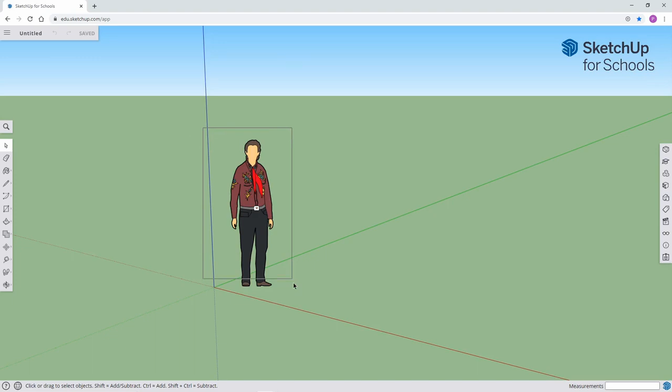The purpose of this lesson is to learn about components.

Let's insert an image. Locate the file. Open. Click the blue image button. Hover over the origin and click. Resize - the dimensions don't matter.

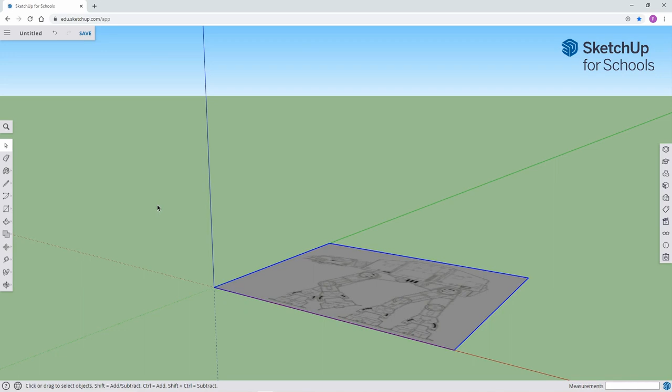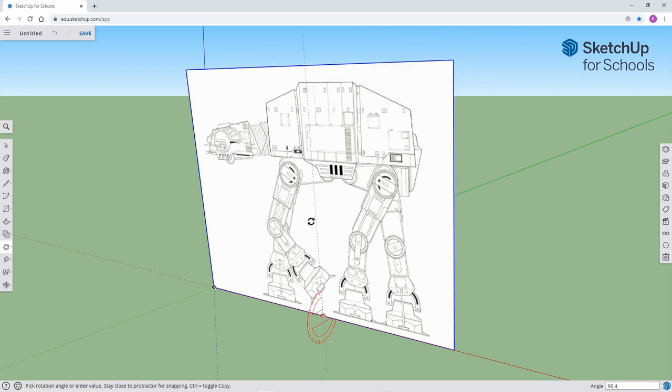Hotkey Q to pull up the rotate tool. Toggle to red. Move over the red axis. Click. Extend an arm, and pull upwards, locking on the blue axis.

Select the movie icon. Look for the house. We're going to click on the side view. There we go.

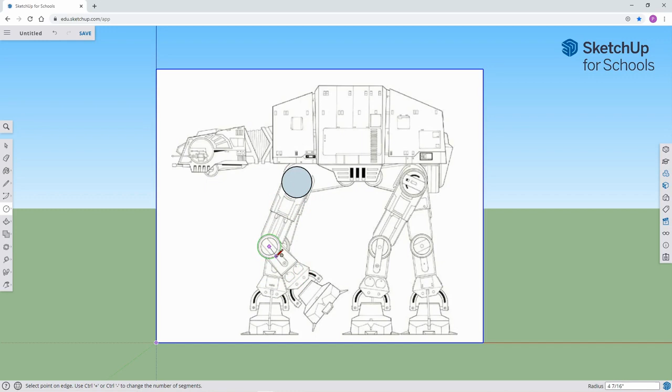Now, let's get right into making some components. Bring up the circle tool. You don't have to be perfect. This gear here looks a little smaller. And there's one back here, I notice.

Now, let's give them some color. Select. How about a blue? Oh, I think I'll paint this one red. And the small little one, how about a nice tan color? Oh, that looks good.

Okay, let's select, right-click, choose Make Component. Now let's name them. This one will be Gear Large.

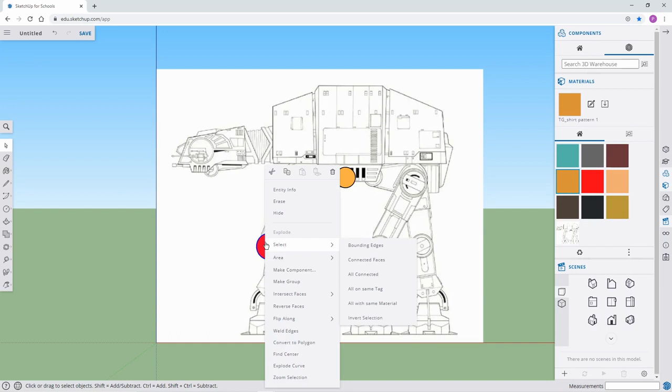Let's select the red one. Right-click, Make Component. Let's call it Gear Medium. And the small one. Right-click, Make Component. We'll call it Gear Small.

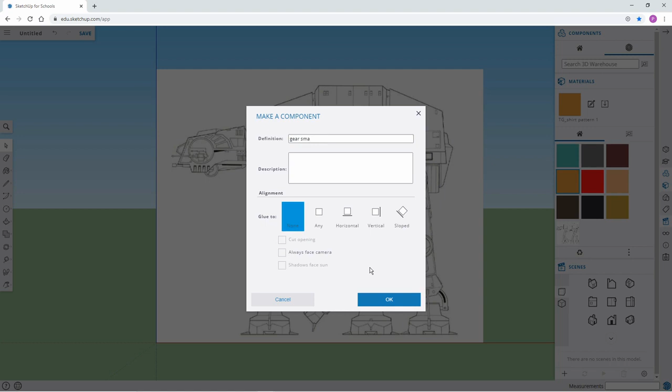The nice thing about components is that we can use these pieces whenever we want. I will demonstrate by deleting the pieces. As you can see, I have a basket of them to choose from.

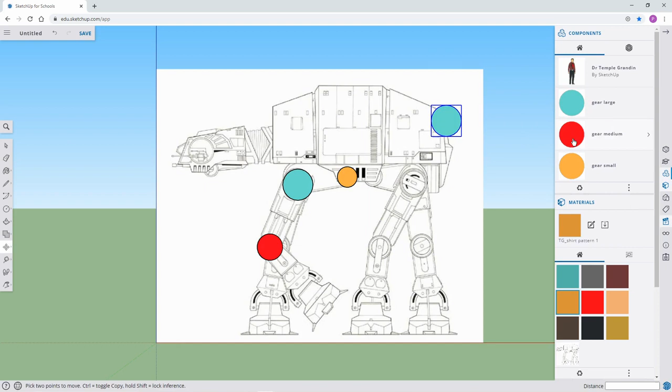I'll pull out a red one. Now I'll pull out the small one. And I don't have to worry about having to make it over again. It's very cool. An unlimited supply.

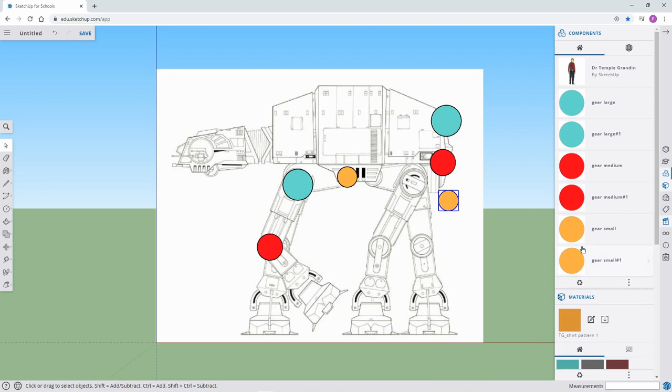Now, let's say we want to tweak a component, make it different. Well, right-click it and choose Make Unique. Right-click, Make Unique. Right-click, Make Unique. Now we have new components based from the originals.

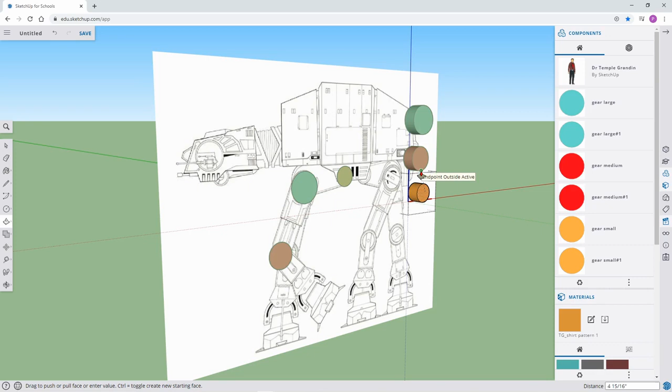So I will push-pull to give these some depth. Push-pull, using the depth of the previous to align the current. Push-pull. Now I have 3 more unique components.

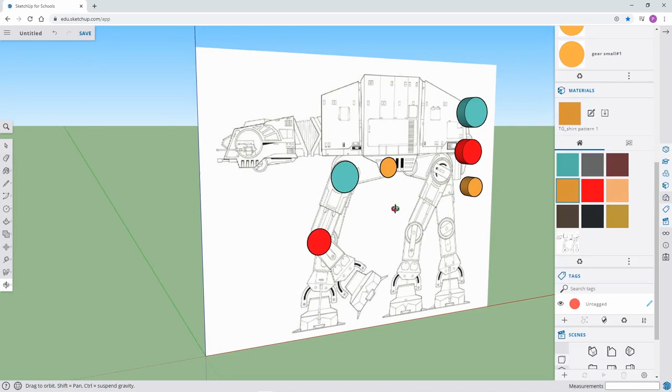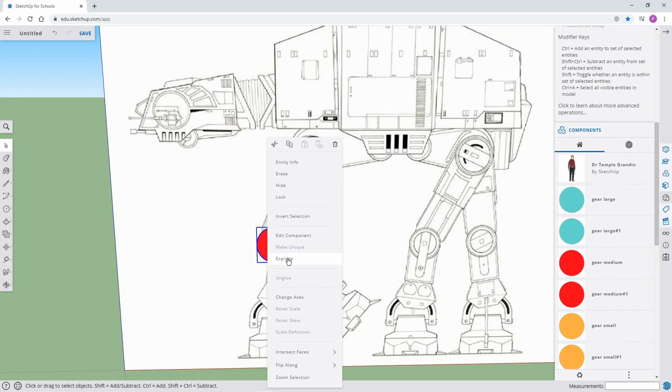All right, let's declutter. I'm going to select and delete some of these so I have room to work. I'm going to show you how you can take a component and explode it.

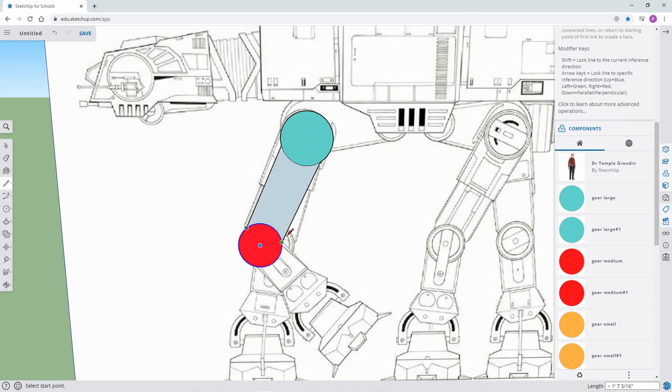This will allow us to merge the components together, thus creating a new one. I'm going to connect these two with the line tool. I will connect the other side, and notice once I do this, it will turn gray. I'm going to bring up my eraser tool, clean it up a bit, and now it is one.

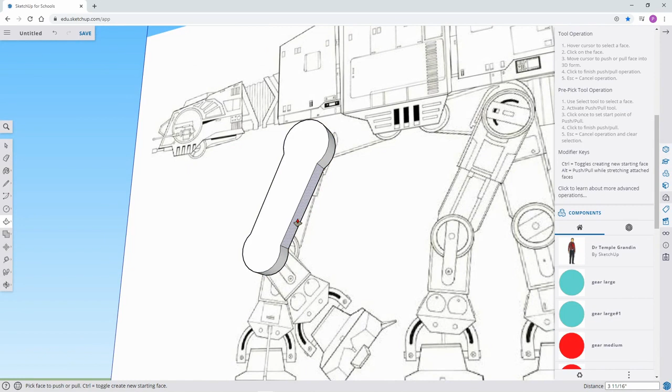Orbit. Let's push-pull to make it 3D. And now by selecting it again, right click, let's make a new component. We'll call it leg top.

And here it shows up in our list. Now, if we check entity info, we will see it is indeed solid.

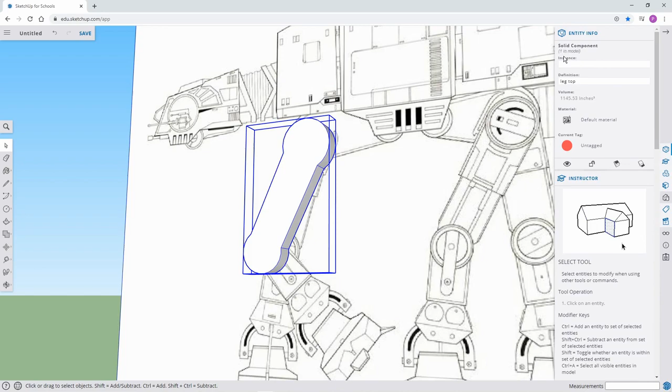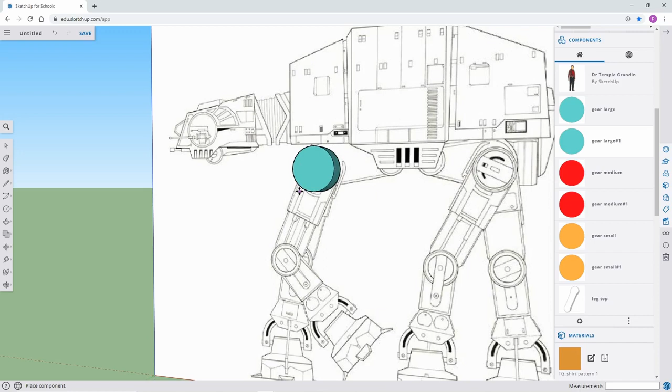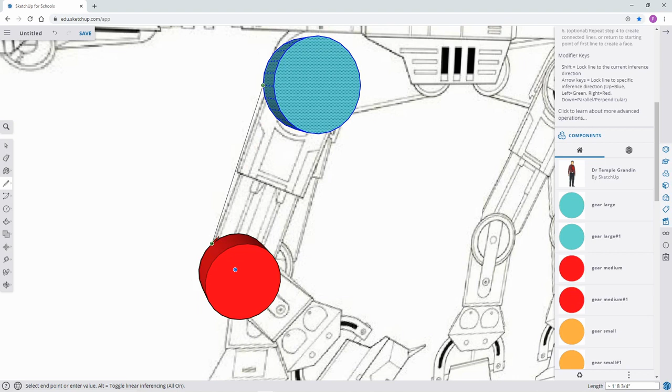Now I will demonstrate an advanced version of what we just did. This time, we will use the 3D gear pieces that we created earlier. Explode them. Select and explode. And now we can do the connection. You might have to take advantage of the orbit tool so you can see what you're doing.

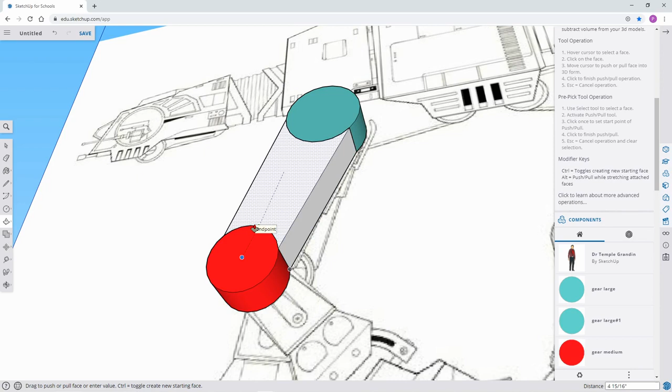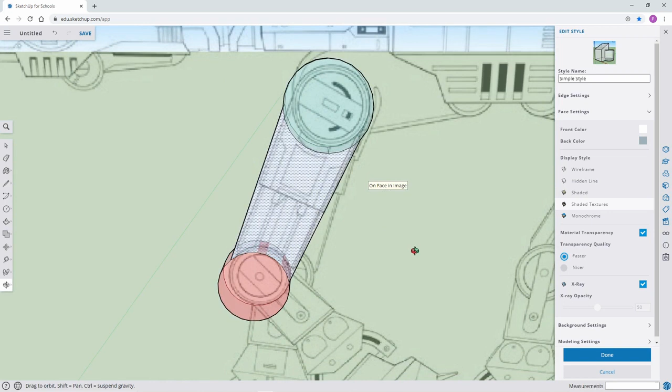All right, I'm push-pulling. Now, let's check to see if we can X-ray this. Ah, that gives me a better view. I think I need to connect some of these lines.

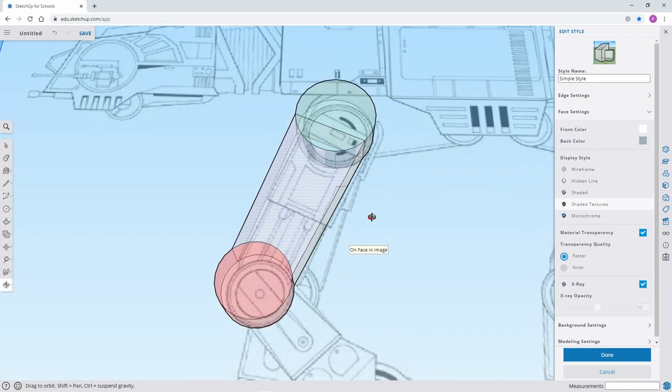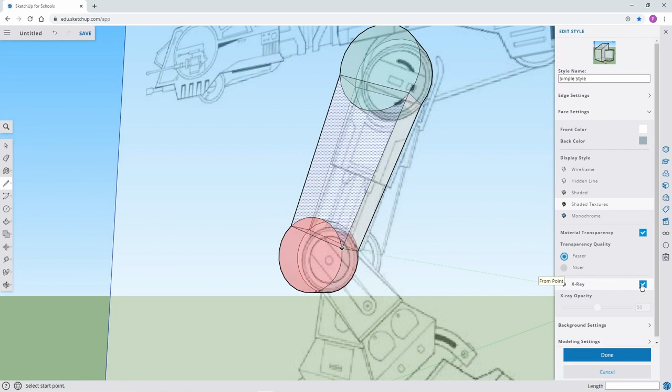Remember, we want it to be solid, so we must perform a few connections. The X-ray tool allows us to see what's on the inside. Now I will turn off the X-ray. Now I need to do some erasing.

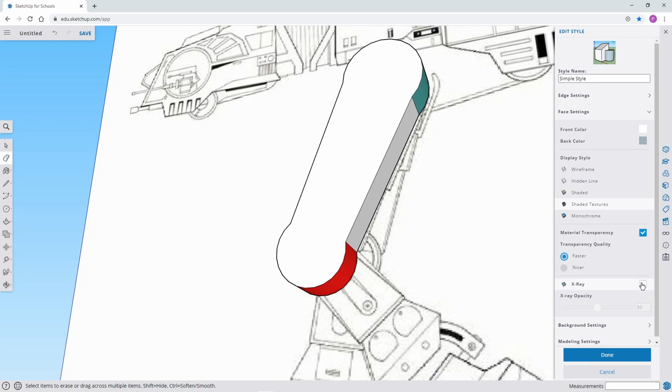X-ray one more time. I notice there are some strays. Remember, the strays will prevent us from making it solid.

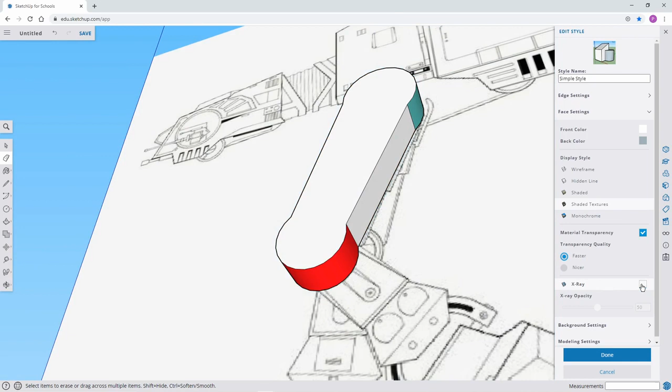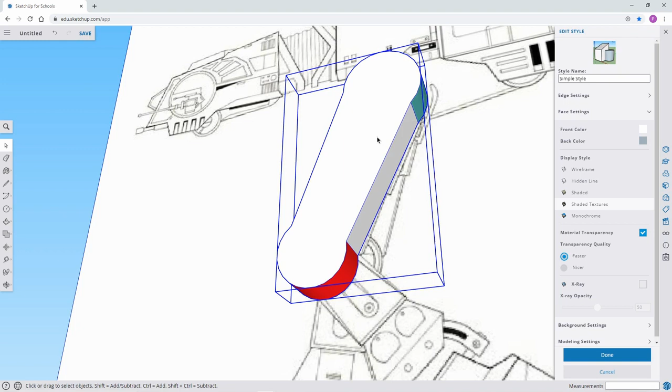Let's select. Right click. And we will make a new component. Let's check the entity info. Move the screen. Ah, it's a solid.

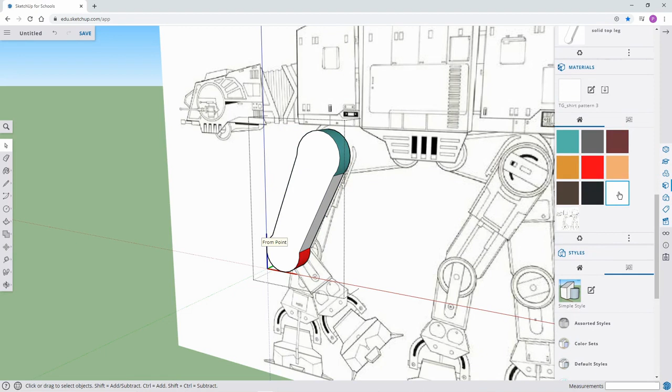Now that it's a component, we can add as many pieces as we want to our image. Let's clean up the color. The AT-AT is white, so it's camouflaged in the snow.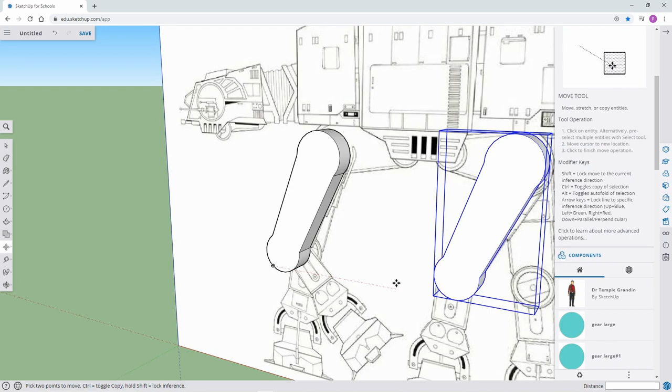All right, let's bring out another leg. This is very easy with components. Now remember, we can move pieces and copy them by clicking the Control button.

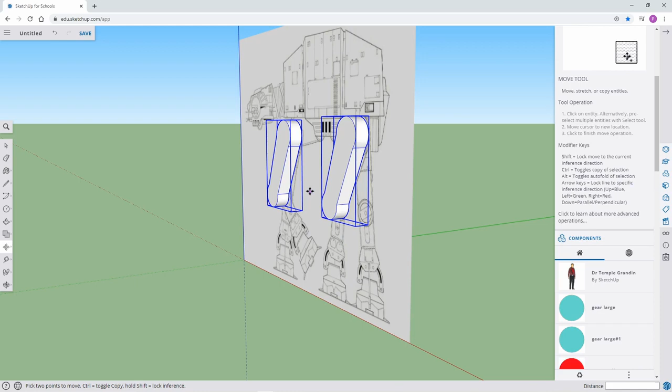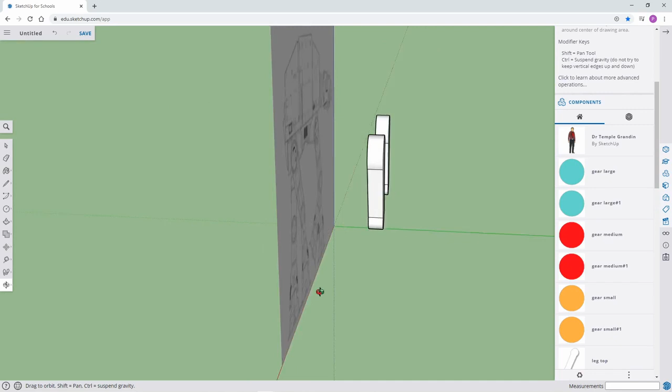Choosing my move point carefully, moving across slowly on the axis. Orbit. Now, if I select my image, I can delete it so I can see what I'm working with.

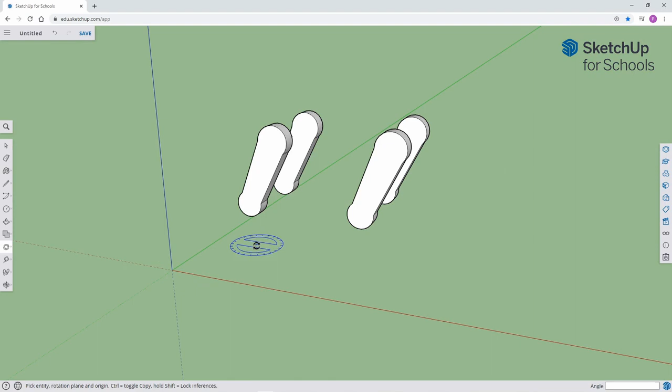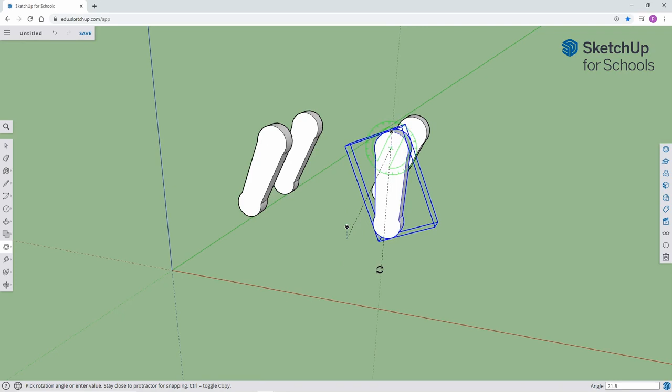Now we can position our legs in any pose that we want. Bring up the rotate tool, toggle to green, click in the center here. Bring down a lever arm, slowly, click, and you can adjust the leg position by using the rotate tool.